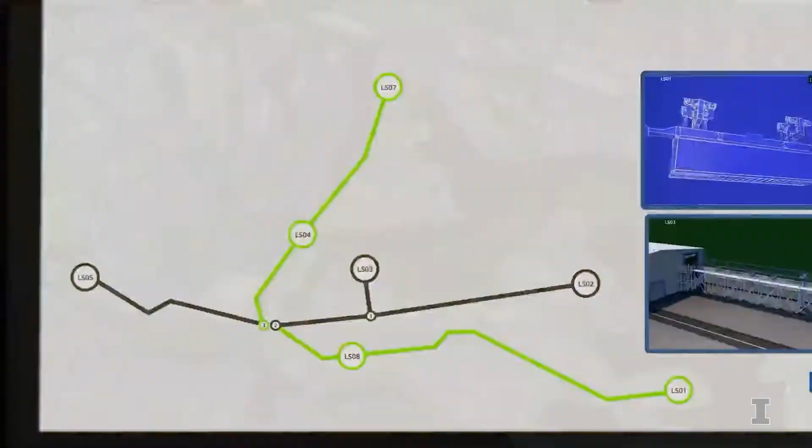The global container shipping industry. Largest network on Earth. Billions invested annually. The mission: more efficient, automated, and data-centric ports. The obstacle: short-haul drayage, dirty, manual, and chaotic. A process still managed with clipboards and mobile phones, coupled with inefficient, diesel-polluting trucks. In short, a failure to keep up with increases in ship sizes and efficiencies in automation and intermodal AI. The solution: EagleRail Container Logistics. Automating short-haul container shuttling processes, improving drayage moves per hour, enabling faster ship turns and greater terminal slot productivity. EagleRail, the world's first and only patented electric overhead container conveyance and routing solution.

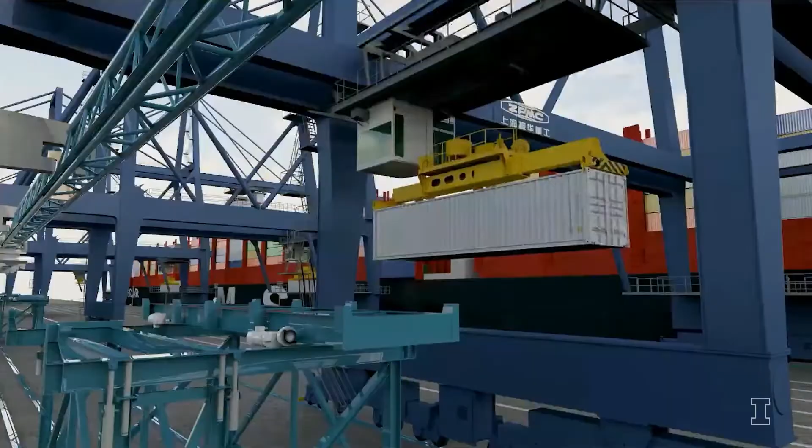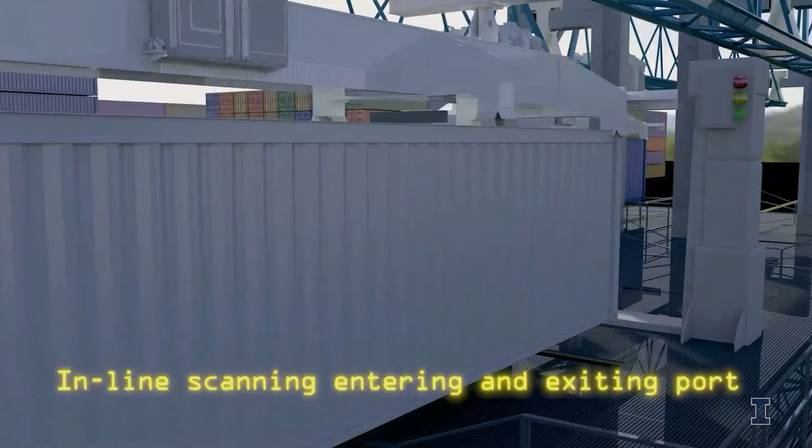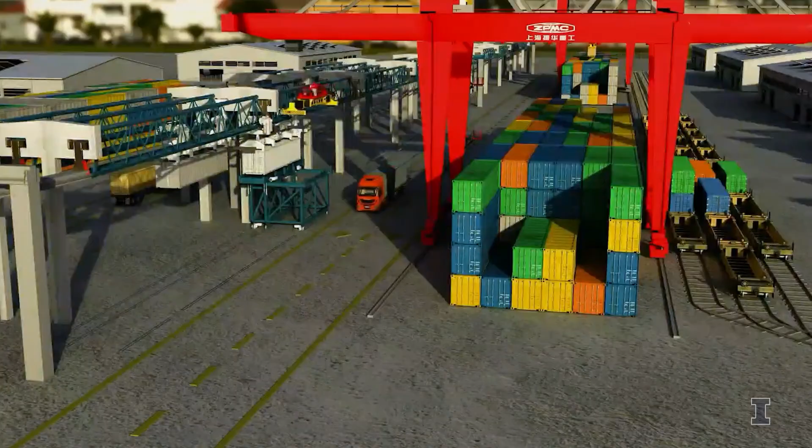EagleRail interfaces with ship-to-shore cranes. Berth evacuation is quick and automatic. Containers are lifted to automated carriers and routed via sophisticated switching. The operation is controlled by Eagle Eye, our intelligent vision software. EagleRail also picks up and delivers from backstack areas, receiving and sending import, export, and transshipping containers to and from inland logistics, operations, and rail yards. EagleRail utilizes unused airspace, and each network is modular and customized per terminal, based on flow rates and functional needs, including customs clearance and scanning operations. EagleRail replaces aging diesel drayage trucks, eliminates gating system bottlenecks, vastly improves overall process efficiency of shuttling containers while reducing air and noise pollution. Result: improved safety and quality of life in surrounding neighborhoods.

EagleRail can be designed in expandable phases connecting ports with rail networks, intermodal parks, special economic zones, and industrial corridors. Result: a clean, safe, and digitally managed and tracked overhead network. EagleRail also supports loading of today's cleaner, long-haul trucking outside of cities at hinterland intermodal facilities. Drives through city centers can now be greatly reduced. Fully electric, EagleRail reduces carbon emissions by over 60% compared to diesel vehicles. Option: the rail's topside can be equipped with solar panels to augment system power needs. EagleRail goes where trucks and trains cannot. Therefore, it stands as complementary, not competitive, with port automation plus long-haul intermodal trucking and railroad investments. Faster shuttling, smarter routing, cleaner technology, digitally connected.

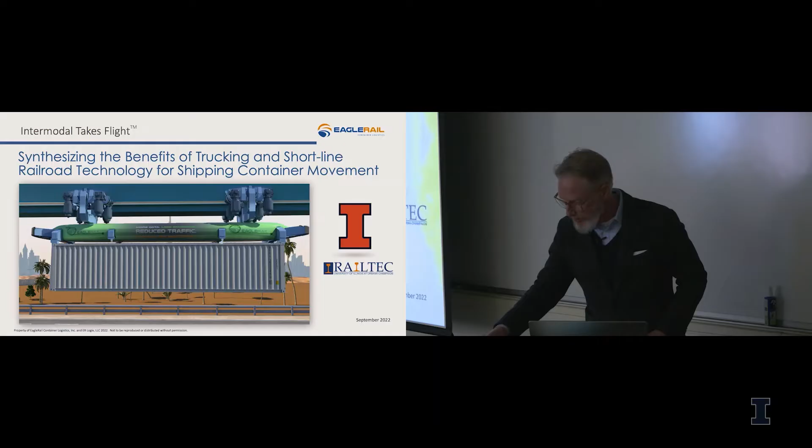EagleRail, intermodal takes flight. So what's a marketing guy doing in rail engineering?

Well, I guess I became sort of a de facto rail engineer 7 years ago. I have engineers working on our team, rail engineers, electromechanical engineers, process engineers, and I've gotten pretty good at understanding the technology of it. I've been in a lot of meetings with very smart engineers from a lot of countries, a lot of ports, throwing a lot of challenges at us, and I really feel like the solution holds up. Let's see if this will work here. Obviously, this is the problem.

If you've never been to a port town, that is how containers get in and out of the gate. So we are talking about just the gating process. We're not talking about the long haul or shuttling within the terminal. We're talking about getting them from the terminal to a nearby railhead, an intermodal yard, or some nearby satellite facility.

This coincidentally happened to be the cover of last Sunday's Tribune in Chicago, and yes, I'm an old guy, so I get the print version to get the crossword puzzle. Pollution, health risks raised on freight corridors. If you don't know Chicago, we have a big intermodal facility where the East Coast and West Coast Class 1 lines exchange containers, and people are becoming very afraid of the pollution and safety that short-haul drayage trucks create.

We do have the patents for both the system and the carriers. A lawyer told me a long time ago to get these, but they're not going to protect you unless you can spend millions of dollars defending yourself in court. But investors like it, so I got them.

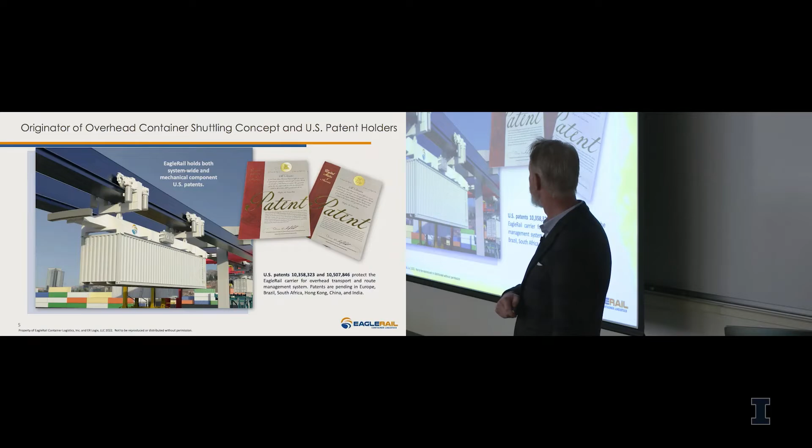I'll talk a little bit about technology in detail coming up, but this is our system. It's primarily a carrier that shuttles, has 20-foot locking pins and 40-foot locking pins, because containers have two connection points. The larger containers, 45s, 53s, still use a 40-foot pin area.

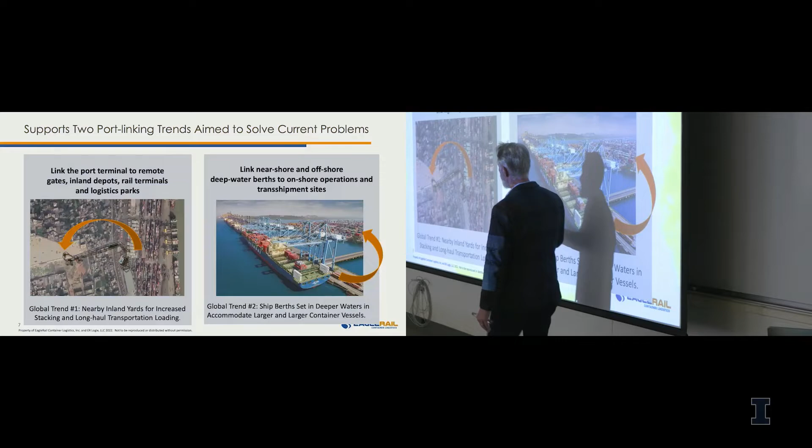The two main uses are going to a nearby intermodal yard. This is a really nearby intermodal yard, happens to be across the street. If you look at the picture on the left, this is Chittagong, Bangladesh. This is their river port, this is their yard, and their new overflow yard is over here. Currently, to get a container from here to here, they have to take it out this road, go through town, come back around the backside. It's about a 2 to 4-hour journey. So they wanted to go right across the street, and we've developed this little shuttling system for them.

And the other trend, of course, on the right is deep sea ports. As ships get larger, they can't come into seaports, so instead of dredging, they just build the docks out further with jetties, and then you have to sort of get your containers into the terminal. So we also have some jetty systems as well.

One of the biggest benefits is connecting it digitally through IoT to smart cities and the whole network. What's interesting is ships have digital manifest stowage plans, ports have TOSs or terminal operating software, rail has their loading plan, but when you go on a drayage truck, a lot of times you're on a cell phone and a clipboard, and so that data link drops.

So one of our big advantages is completing the data link. If you can evacuate a port faster, you can make a lot more money for a port. It's like an inventory turn in retail. Each one of these slots has a certain target goal for money. Every time that container sits there another day, either somebody has to pay for it, a demurrage charge, or that slot is losing money. If you can evacuate containers faster, you can have a higher throughput on the same piece of property. The biggest problem in ports today is they're growing about 4% a year, year over year, on the same piece of locked property.

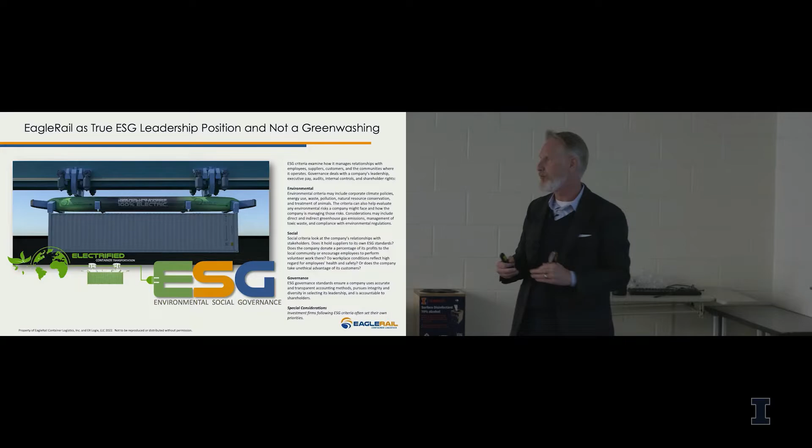We also have a huge ESG component, so environmental, social, governance. Obviously we're all electric, we consume 60% less energy, 70% less particulates. Social, we're safety, we improve safety around port towns. And governance is what you want to make of it.

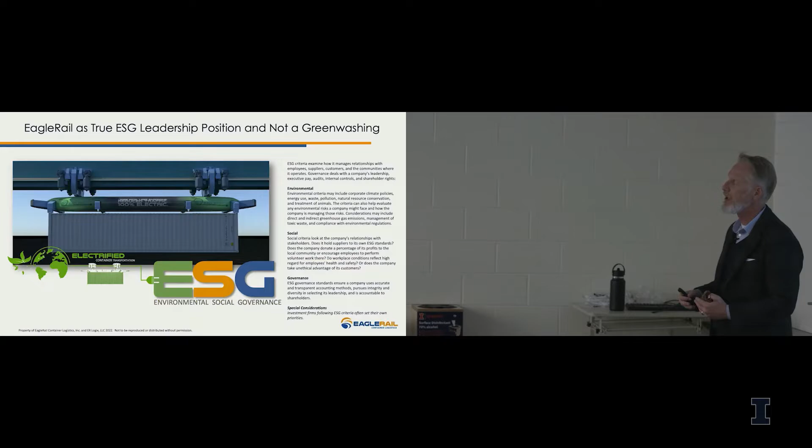Clean business, governance. We go to a lot of these countries, and I get these sort of winks and nods about what it will take to get a system built here, and we don't play that game. We'll never play that game. We're American companies, we're held to the highest standards. I will never do anything that's non-reportable to get a project built.

EagleRail created this company called ER-Logix. ER-Logix is a devco. If you understand the business, there's really complicated rules about who can invest, who can have a legal license in various countries. So we created a legal entity called ER-Logix, or ERX.

We've been to all these countries. I've probably been to half of those myself. And now with Zoom, the pandemic did something nice for us, it cut down my international travel. Sometimes it's a 24-hour flight in coach, I can't afford business right now. If you've ever had a long flight in coach, it's miserable.

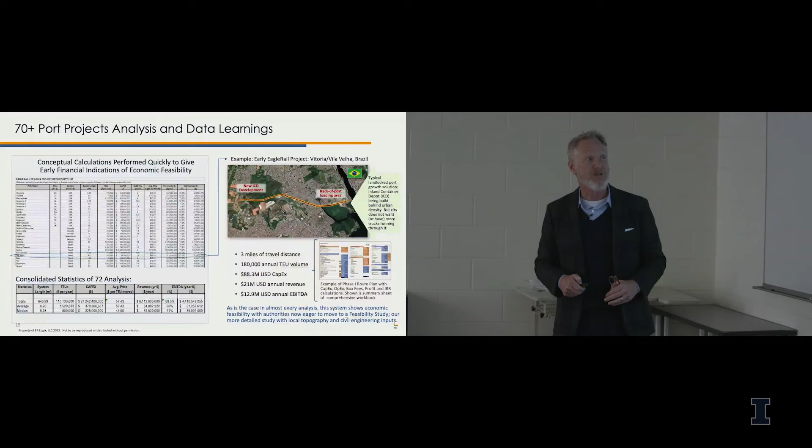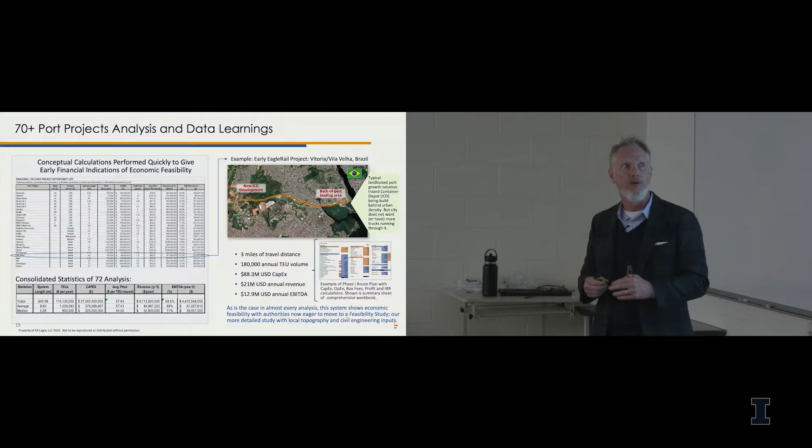Now we do a lot of our calls just on Zoom, and the outcome of these meetings is what we call preliminary design. If I know three things, I can do some calculations. If I know where the pickup points are — 1, 2, 3 on this map, here's the port, here's intermodal space 1, here's intermodal space 2, a new one — then I know the distance of track, and then I need to know the volume between each node. With those three factors, I can create a pretty rough CapEx and OpEx.

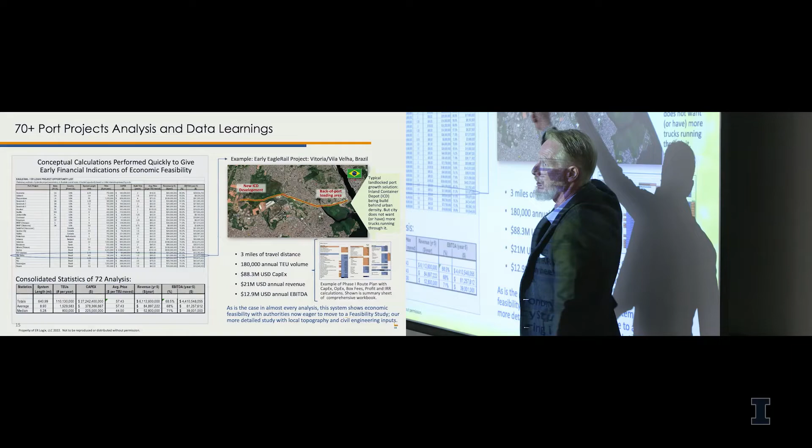If they want to buy it outright and have us do maintenance, or they want us to operate it as a service, shuttling as a service, then I could tell them what per box move costs. So the first thing they always want to know is, how does that compare to my truck? If you're going to charge me $80 to go that way, what's a truck going to cost to go that way, right? And I always say that's not the question you should be asking, because there's all sorts of other things we can compare in our price.

All those social and environmental benefits can be quantified: number of pollutants avoided, road construction avoided, road maintenance avoided, safety improvement. Those are all quantifiable, and we can actually show why maybe the truck is $70 and we're $80, but it's still a better long-term economic decision.

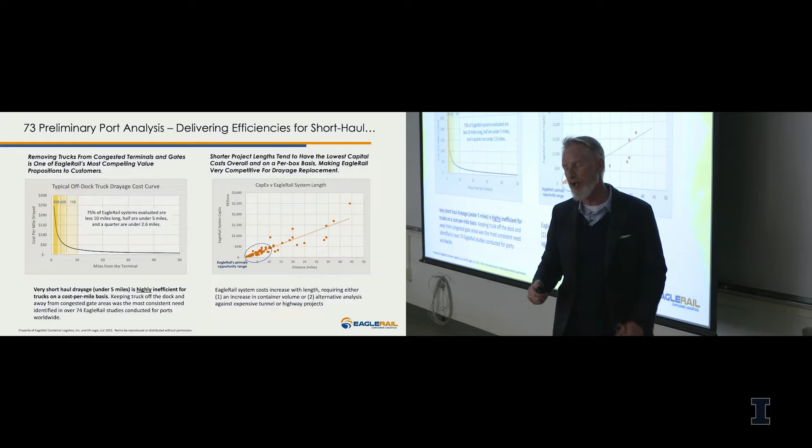What we have done collectively, as we looked at those 72 studies, is we've realized what we knew intuitively: we're a really good system under 10 miles. Once you go past 10 miles, you should put it back on the ground, because that steel is expensive. You don't want to have it.

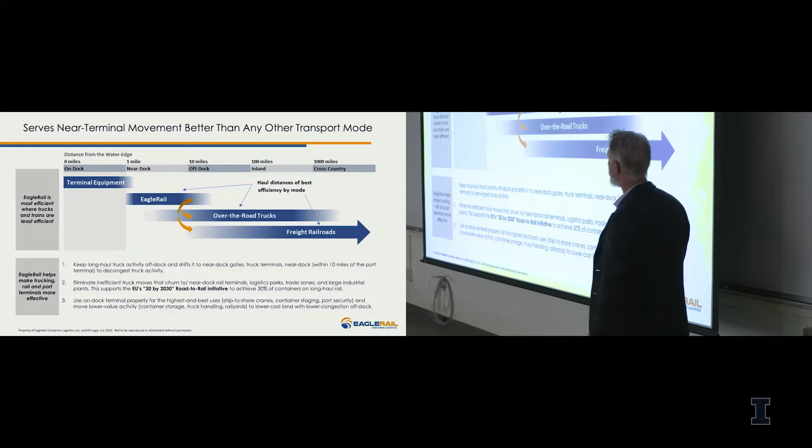Most of you have been to Chicago, you know what the L looks like — our structure is very similar to the L. It's elevated steel, and that stuff's expensive, so the faster you can put it back on the ground, the better off you are. We did a little analysis of what types of horizontal movement containers should be handled by: if it's on the dock, terminal equipment; near dock, overhead shuttling is perfect; a little bit longer, an off-the-road or over-the-road truck; and if you go long, of course, nothing beats long haul rail.

Another analysis we did: if a port wants to expand, how many millions of dollars is it per slot? We did an analysis based on a Long Beach expansion project. Long Beach is expanding, $2.2 billion to get a certain amount of slot capacity, which comes out to about $1,200 a slot. If they were to build a satellite storage operation and an EagleRail system, the EagleRail system is about $300 per new slot. You'd have to add in the cost of the satellite too, but it's going to be less than the $1,200.

Now, I'll get into a little bit of the technology details.

We break our system down into 5 components: the electromechanical, the carriers, and then the lifters and loaders, because the load table has to be raised up, trusses and columns, the civil, and then a more civil track, rail, and switch, which is in your bailiwick, and then of course the operating system and our scheduling software called EagleEye.

It's really a TOS, basically. It works with the port interface to say these boxes are going to be ready, they're going to this node, and then it starts to schedule where it goes. Where it really matters is if you have a single line system or just 2 points, it's not that big of a deal, you're just going back and forth. If you have multi-nodes, then you want 3 going this way, 3 going that way, 3 going this way, and then coming back, what are you taking back?

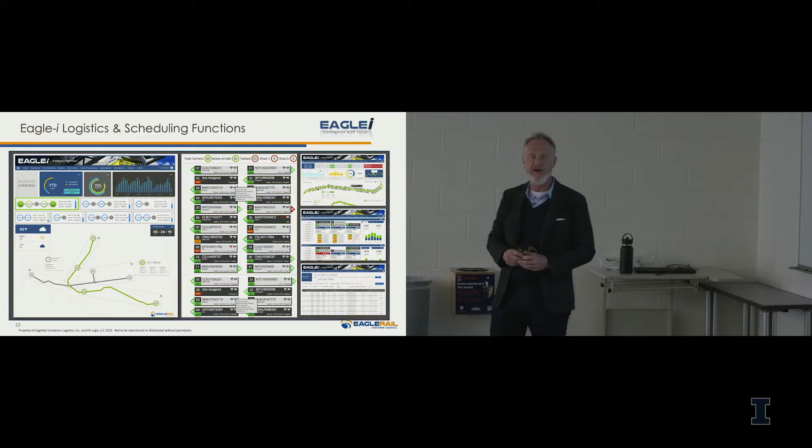These are basic artist renderings of our beta software design. This happens to be Durban, South Africa. It's a very complicated multi-nodal system. It has two berth-side pickup stacks, it has a rail yard here, another rail yard here, a truck yard, and a truck yard.

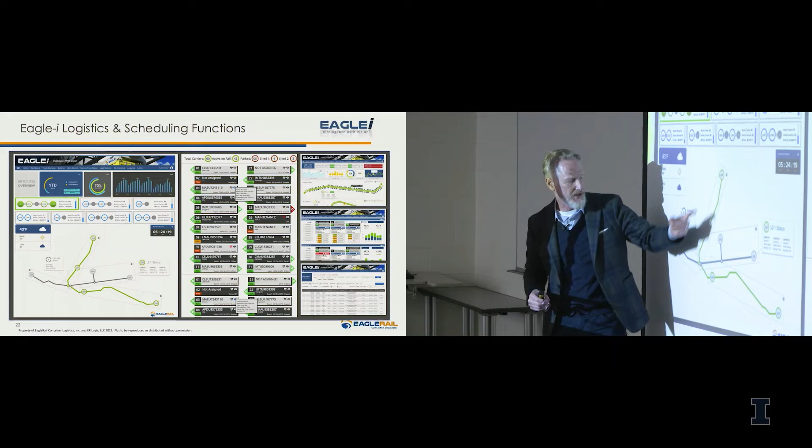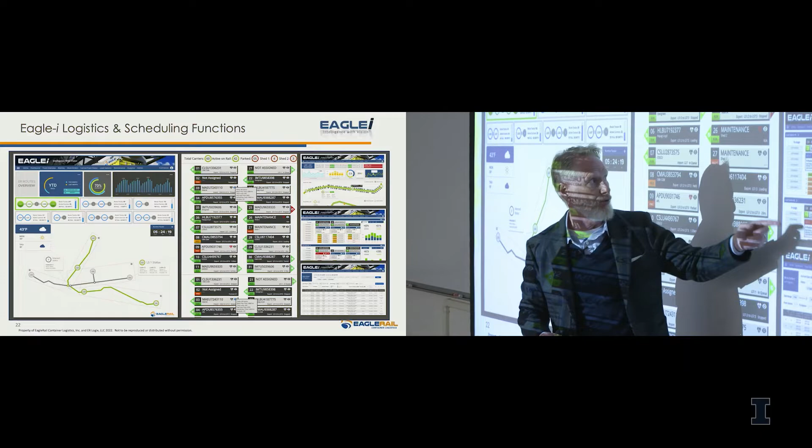This is our vision for what the operator will see when he's running it. It's like a remote train system, as I'm sure you're familiar with. Our carriers are married to every container, each has an ID, our carriers have an ID, and they get married for their time on the journey. We can track all the time where the carriers are, look at the activities of the load stations, and look at the general scheduling for the day type of operation.

The electromechanical up close, we have 2 types of trusses. One is a box girder, and one is a lattice structure, just like you see here. These are obviously more visually pleasing for installations around urban areas. That box girder is a little bit of a hulking thing. And I'll get into the structure.

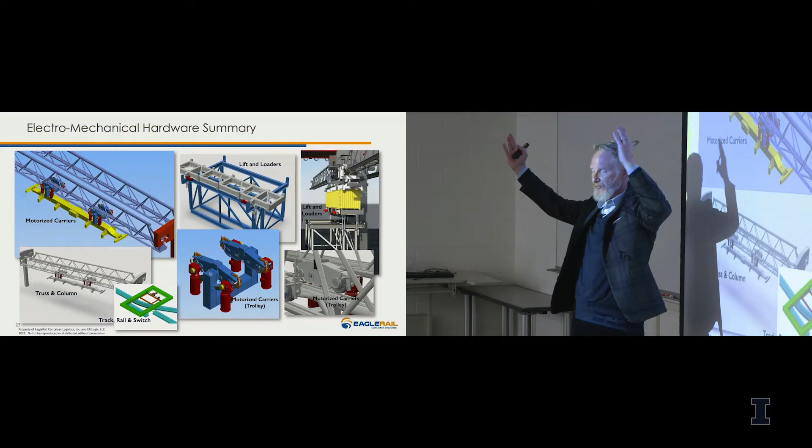This is the overhead switch, very much like a ground rail switch, but it's in a framework up above. It has to slide forward and backwards, or side to side, I should say. The carriers, the wheels, it's steel on steel.

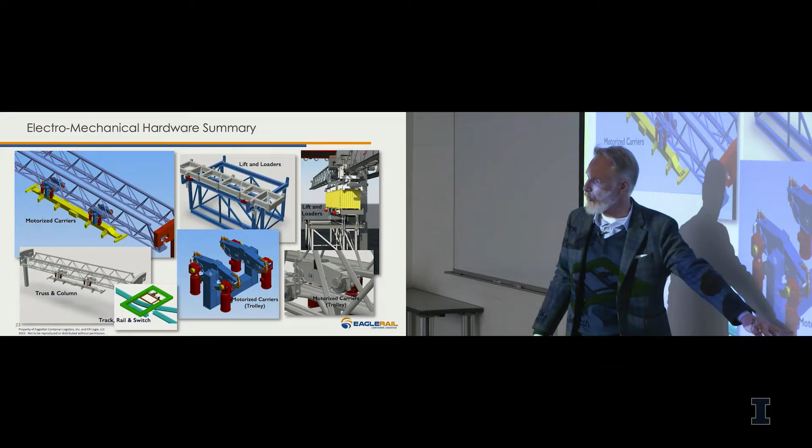We have traditional motors from port equipment, a drivetrain, side guide roller wheels, which I'll show you in a moment. The table can move in 2 dimensions or 3 dimensions. You put it on the table, it can slide back and forward, and then up and down. It can also gantry on wheels to follow another gantry crane, whether it's a ship-to-shore crane, an RTG, or an RMG.

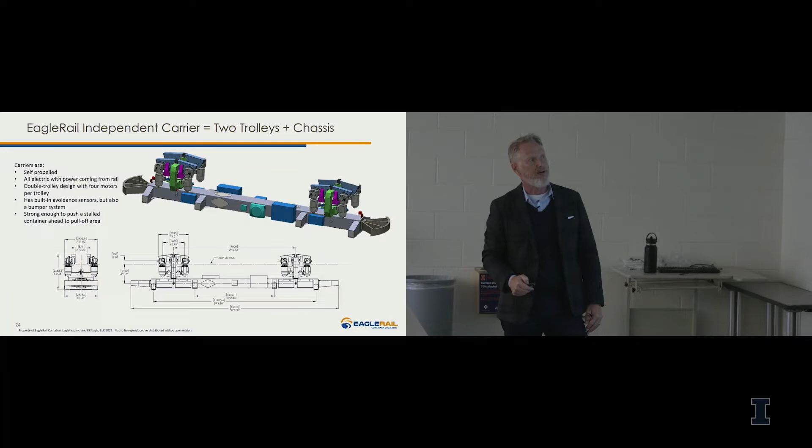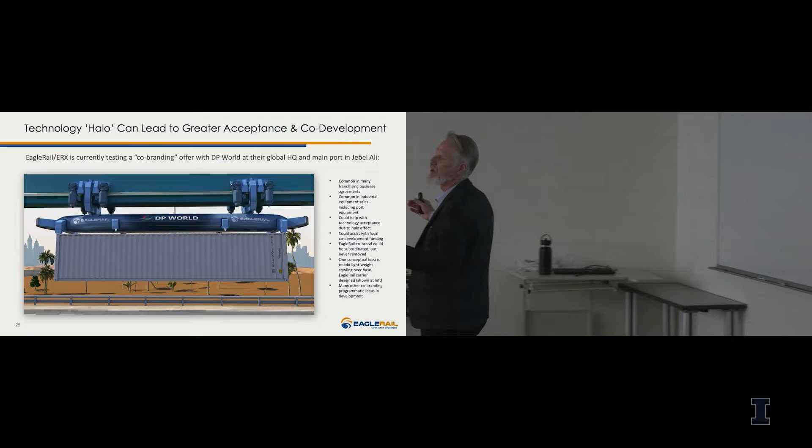That's the carrier, what it looks like, the skeletal part of it. We have this program where we can add a lightweight aluminum cowling to it and co-brand it. So when you're going to a port and pitching them, they don't necessarily want to see EagleRail running around, they want to see their brand running around.

So this is what the current trolley design looks like. There's 4 motors each trolley, and 2 of these on each carrier. It's designed to be strong enough so that if a fully loaded carrier carrying a box stalls or loses power, the one behind it can actually push it forward. So the motors are strong enough to do that.

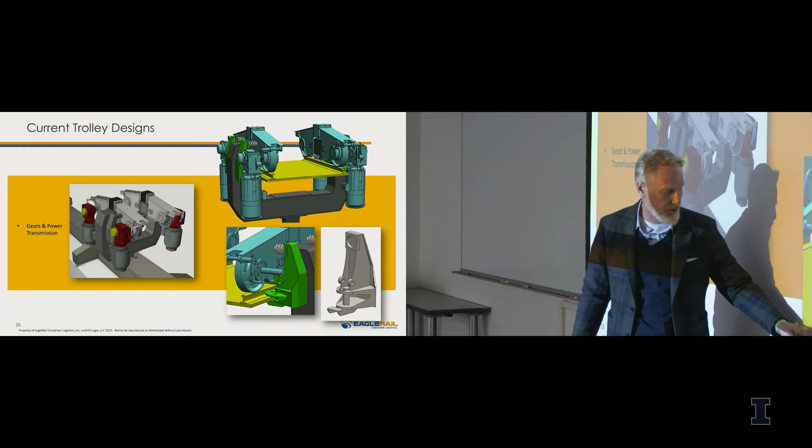It has side roller wheels on it, as you can see here and here, and it also has an I-beam or crane rail design as well. Our components, we've been redesigning and tweaking this thing for 7 years.

Obviously, one of the most important parts of this is the kingpin, locking it to the trolley. If you know how containers work from that video, they have those corner casting pins that come down and lock. Those almost never fail, one of the lowest failure rates. And a container can really be hung from 2 of the 4 — even if 2 failed, the other 2 will hold up the container.

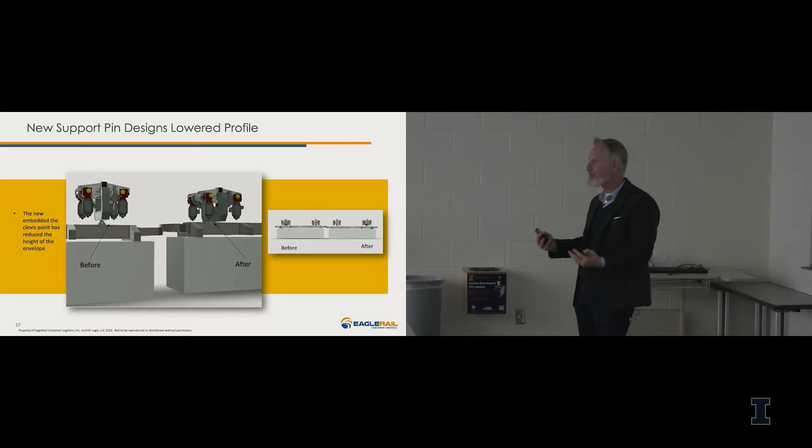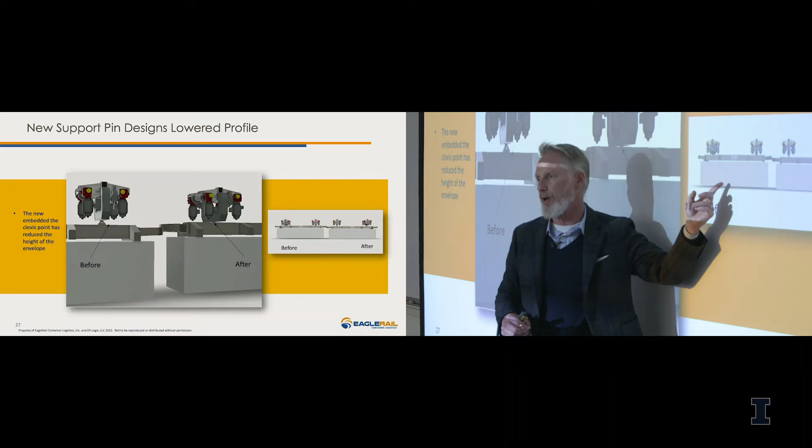The only time, once in a great while, you'll read about a bottom opening up on a container — if you get something like a marble load or some stone order, it might puncture through the bottom. That's why we have the catchment when we pass over passenger areas.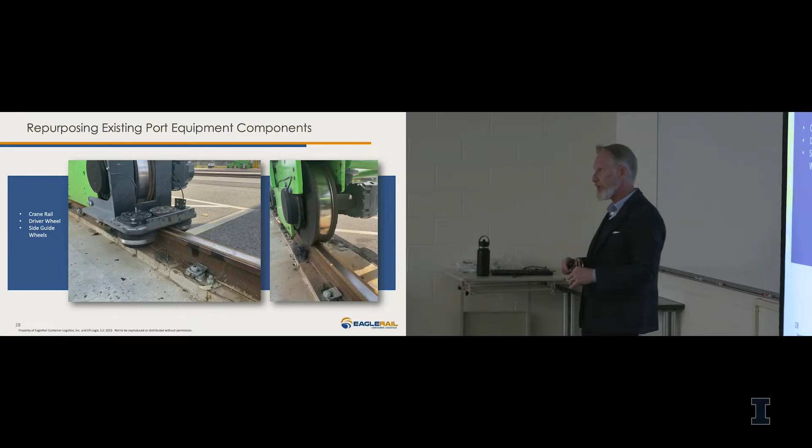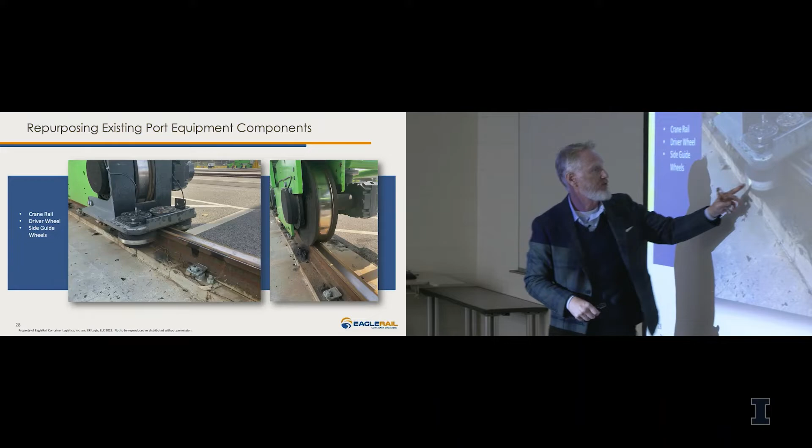This is in Savannah, they just opened up what they're calling their mega rail center, and this is a gantry crane that loads the rail cars. But why I'm showing this to you is the rail — the guide rollers are similar. Our wheel probably won't have a flange on it because there'll be no need, but we use very similar guide roller wheels as well.

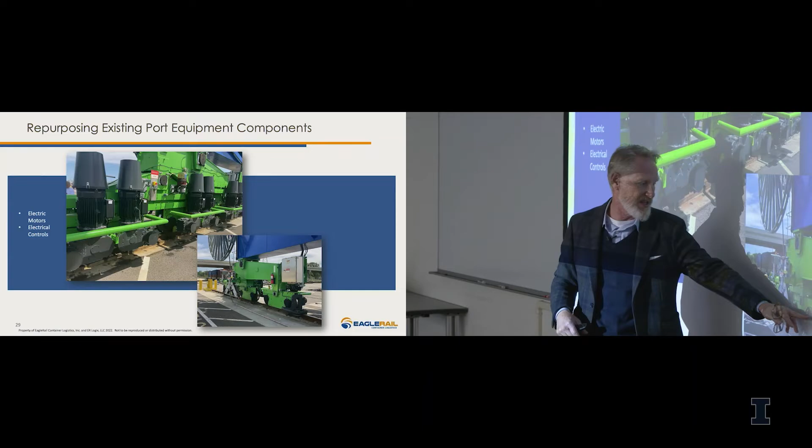This is — I don't know if you guys have ever seen one of these gantry cranes. They're unbelievably large, right? What's fascinating is not only are they gantrying in two directions, but they're doing it with a fully loaded box on them, which is really quite heavy — 70,000 pounds. Those gantry cranes will have 4 of these and 6 wheels.

But the components we're using are exactly the same — those motors you see hanging on ours are the same motors, just above the wheel on theirs, and below or next to the wheel on ours. So what's really interesting is when I talk to ports, rail companies, and investors, they ask what the technology risk is, and I say it's almost zero, because I'm just using a kit of parts from other pieces — all the crane and rail industry technology, I'm just repurposing into an overhead system. So it's all proven technology.

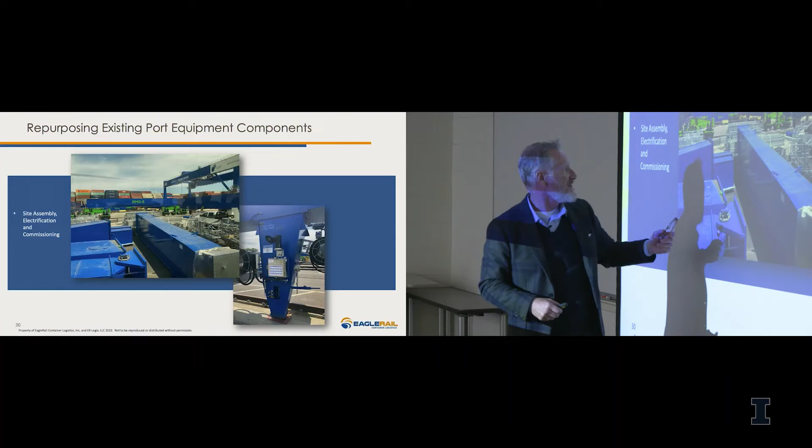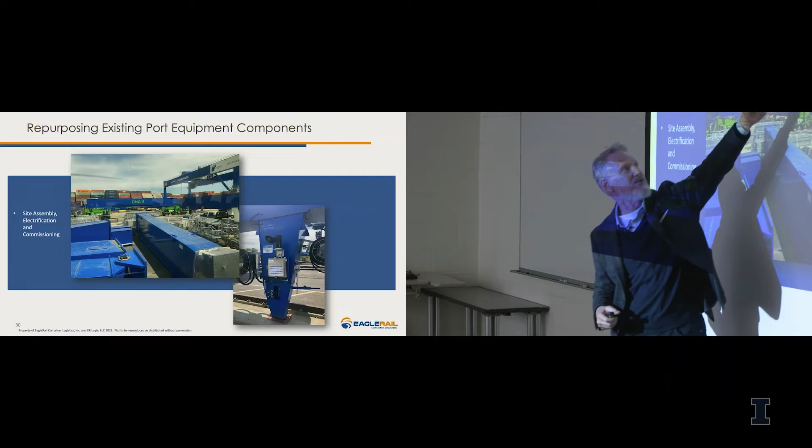This is one of those gantries back here. And this — I just couldn't help myself — it was like IKEA. They were unwrapping a new one and all the bolts were in a bag, and I'm sure there were instructions with pictures. So they're standing one of these things up. I think it's their 8th one, something like that.

RMG is rail mounted gantry and RTG is rubber tire gantry. You'll hear those terms a lot in ports.

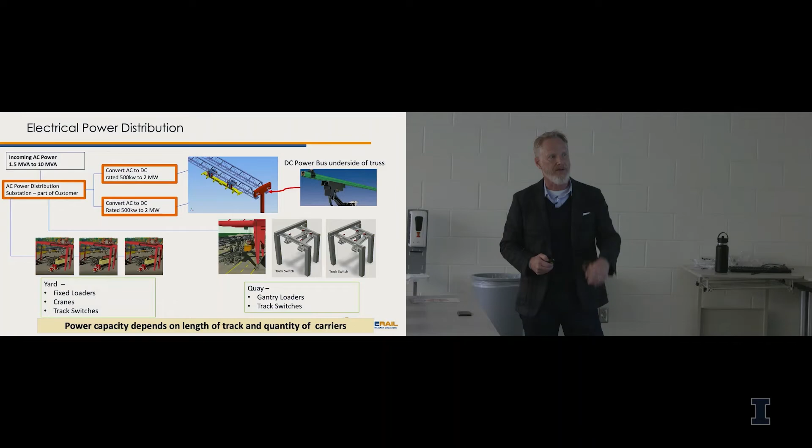Power distribution: we take the AC and convert it down to DC. It's on a bus bar, pretty simple, and it has to run the length of the track. There's an overhead switch as well.

My favorite truss design, of course, is the tubular truss. If not tubular, then a flat truss design. I think it's just a much more elegant system.

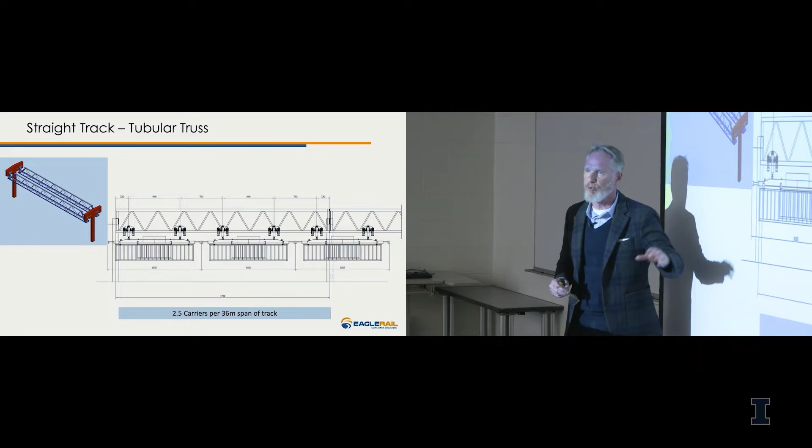We designed this — we were talking about it in our private meetings. What's the strength, how strong should we make this rail, how much steel should we put in there? A fully loaded container is 70,000 pounds — what happens in a power situation where you lose power temporarily and have fully loaded containers hanging off the steel? How much weight can you suspend and for how long is a big safety question.

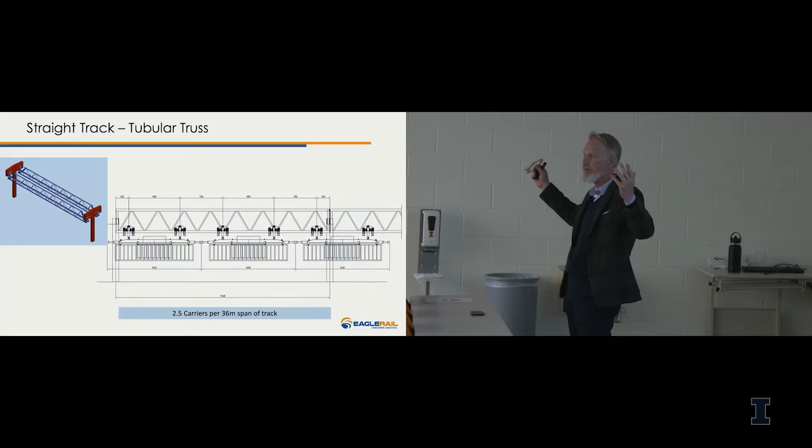Interestingly, only 2% of all containers are fully weighted out. They call it maxed out on weight or maxed out on cube. They're mostly cubed out - the space is taken up way before it's ever hit 70,000 pounds. But we feel like we have to design for the heaviest containers possible. That will affect your truss length, the number of columns you'll put up, and how deep you'll put your piers.

Every once in a while, someone will say, why is that not on top of the rail? Why is that suspended? That's a question I get in almost every presentation. The reason is most of our interfaces are from the ground up - we're taken from a stack. It's very much akin to factory automation, where you see parts moving around on a suspended rail and being set back down. That's a very similar model to what we do.

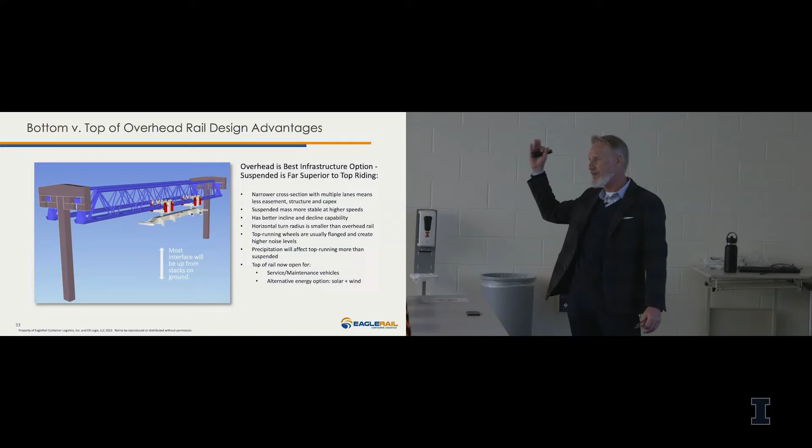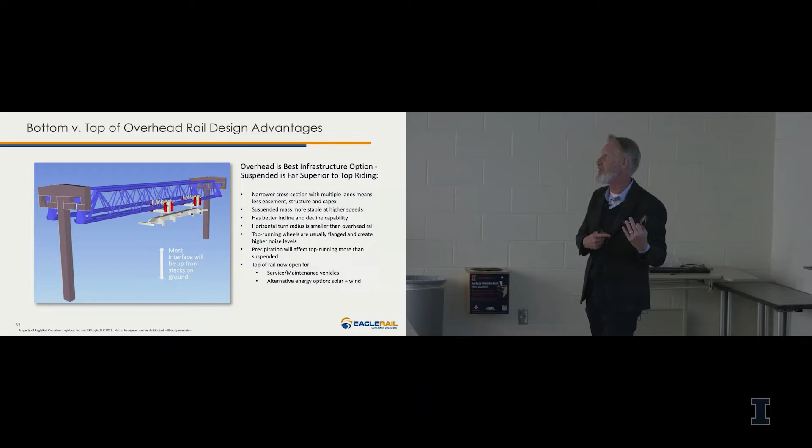Number 2, suspended weight can go around a corner much faster without having the centrifugal force wanting to fly off the top. It has better incline and decline capabilities. Therefore the profile could be narrower, the turns can be narrower, there's less steel. That's my patent - I have a patent for underneath. So if somebody wants to come into the market with an above the rail system, we'll be competing.

Our track and truss can be single lane, double lane, or triple lane. The one we quote the most is a two lane going back and forth. If it's lower volume, we can do a single lane. A lot of these really large volumes need a third lane - this is your loader lane where you're picking in and the table's going up and down. This is your middle lane, taking empty carriers and putting them in the queue for the next container. And this is your bypass lane. So when we go into heavy volume situations like a rail spur, we create a three-way spur.

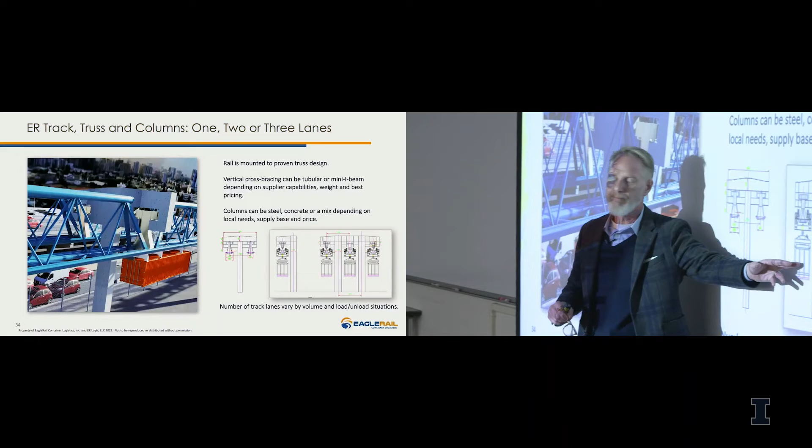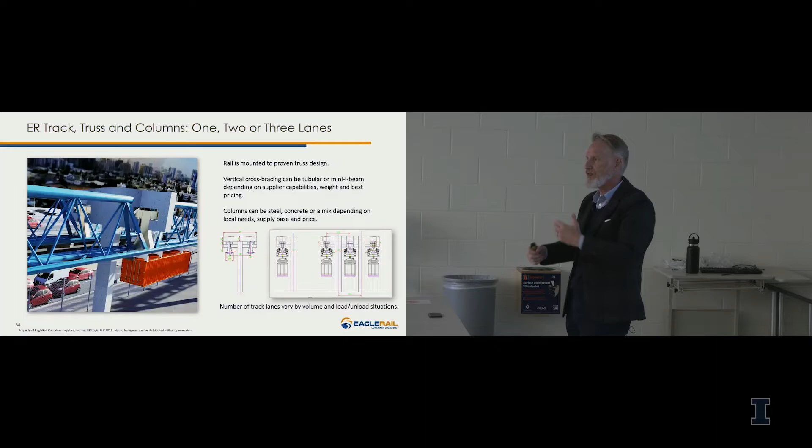Now what's really interesting - a single lane can shuttle up to about 400,000 or 500,000 a year volume-wise, and we do a volume rating. The only way we could do that, if you think about it, is you have a two-node system and you send your containers headed toward each other - you have to have a center bypass for them to go past each other. So it's not completely single lane, otherwise you'd be waiting for a complete clearance, and you don't want to do that. To keep up your shuttling rates, you have a bypass situation.

You design to bypass, but now you have to platoon containers - you've got to take 4 and 4 and send them toward each other, bypass each other. So there's a lot more operating involved. If you do a double lane, it's not quite 2x the expense - it's about 80% more. But once you do a double lane, your capacity goes to about 4 million a year because you can almost never clog that system up, and then you go to triple lane.

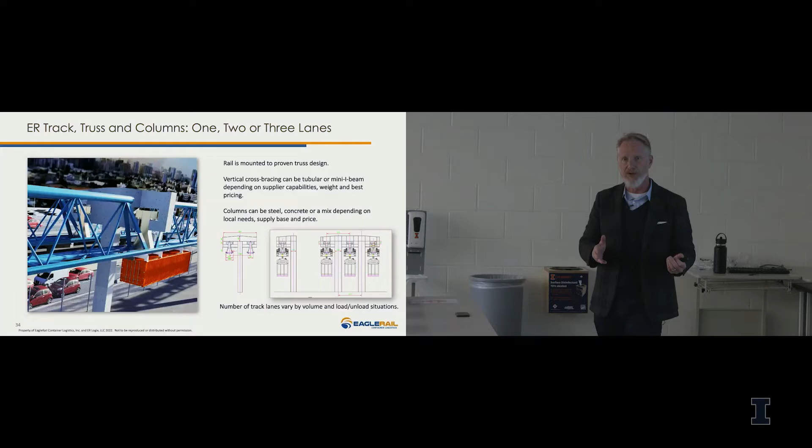Just for reference, a typical container ship, the bigger ones now, are about 20,000 containers, which is huge - they started out being 4,000 and 5,000, now they're 20,000. Our two biggest ports in the United States process about 7 or 8 million containers per year annually. The biggest ports in the world do 40 million - Singapore or Shanghai, it's unbelievable. Singapore, Hong Kong, they do about 30 million.

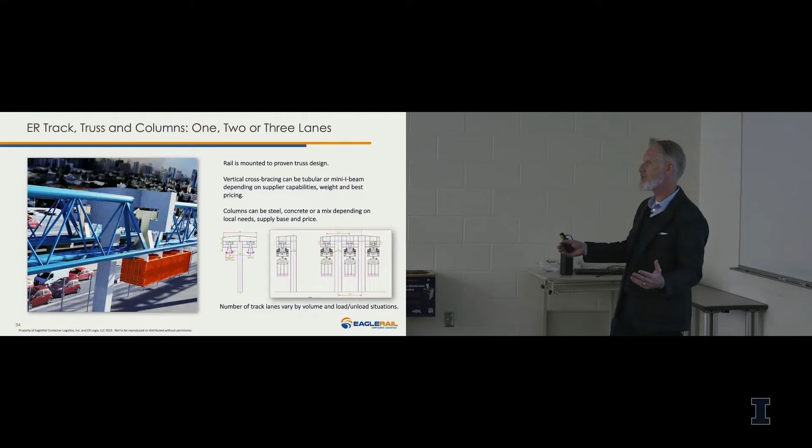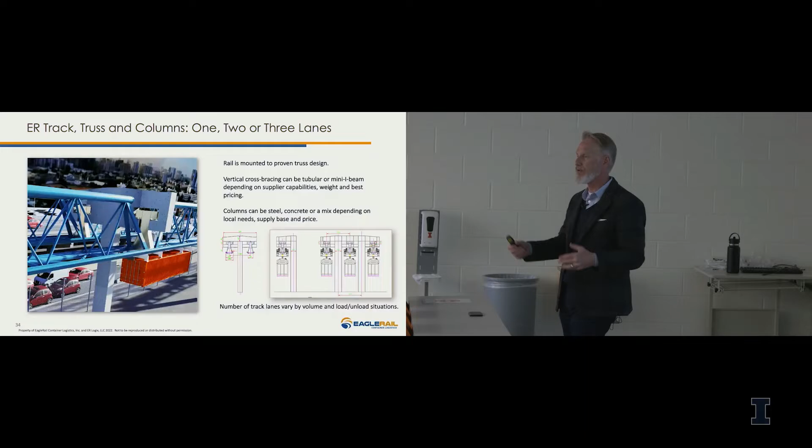So we have been approached to do systems ranging from 200,000 shuttling per year to 5 million shuttling per year. It depends on my 3 components: volume, pickup nodes, and length of track, and I could do a pretty good estimate on that. Of course, we have a catchment - we were talking about it. Something for students like you to think about, this catchment.

Since the corner castings only fail about 1 in every 2 billion uses, and the bottoms open up maybe twice every 10 years, it's a very rare occurrence. But from a safety perspective, nobody in the world will let us put a system in without a catchment crossing.

But what should it be? We talk about this all the time. Should it be some super strength fabric? Should it be a metal? A chain link? Should it be mesh? And how close should it be to the actual bottom of the container so you're not building momentum before the failure?

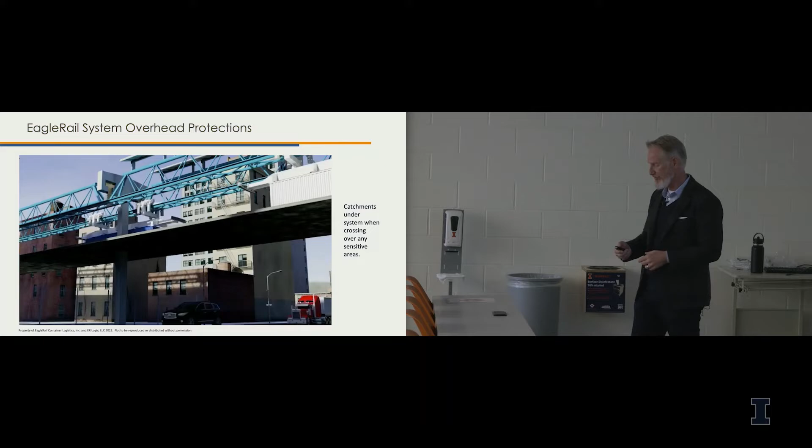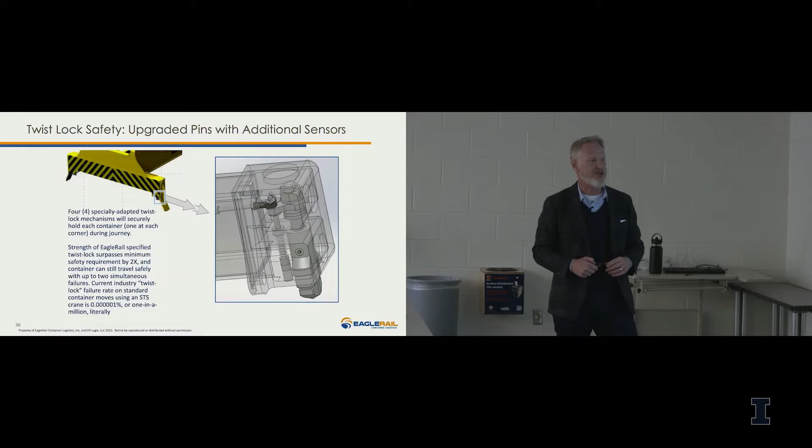So we have several systems we've designed, and I'd be curious what you think a good catchment would be. We have the standard corner cast locking pins, but we've beefed them up so we reduce the failure rate of the corner castings. Again, a container can hang off of 2 of them even if the others failed—this is our overhead switch, with a couple different designs.

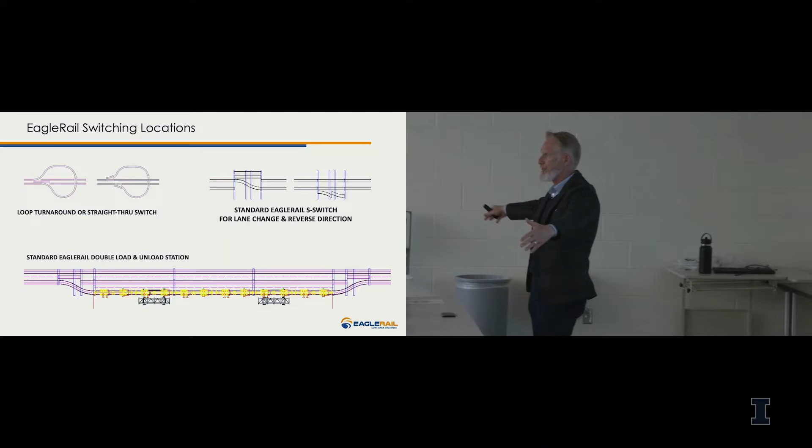One of the things people come to us and say is, right now where the boat parks is called a berth, and they say, I have a berth here, but in 5 years I'm going to have a berth here, and another berth in 5 years after that. So we have a system where we can create a loop turnaround once it gets to the end of the first one, but we pre-design it so that when they expand, you have a pass-through system.

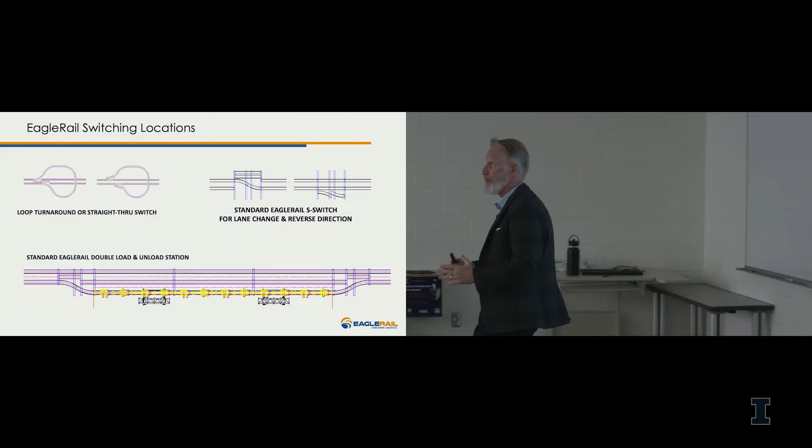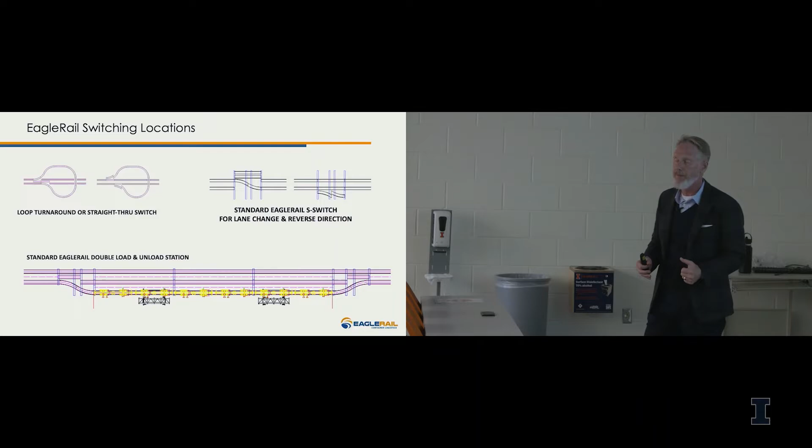We really want to know, when designing a system, what's your 30-year volume? We don't want to know your current volume, because one, we want to support the capacity, and two, the only way people operate ports and buy those expensive cranes—those cranes are $10 million each—is to get a 30-year operating concession. That's how you lease equipment: I'll move your boxes if you give me a 30-year agreement to do it. We have to have a similar long-term agreement in order to afford this equipment. So I need to know when that berth goes online, and have the complete volume projections.

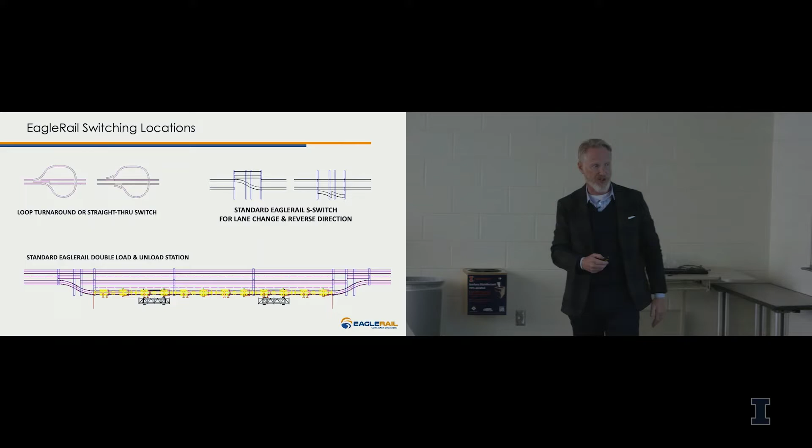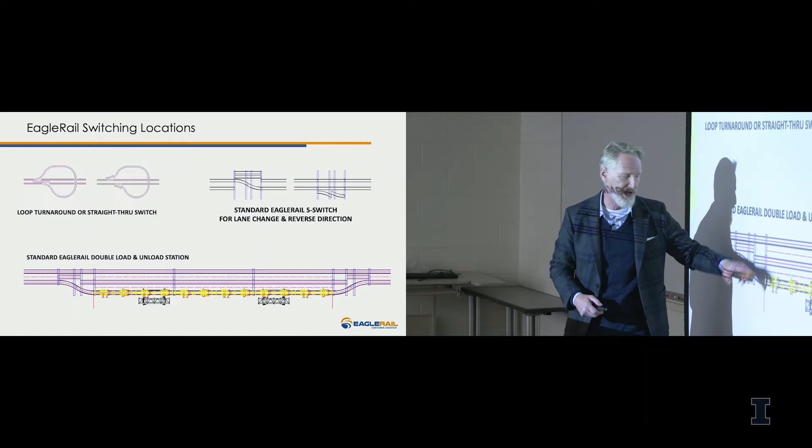This is what I was talking about for the 3 lanes, for a heavy volume pickup situation where you have your pickup lane, your empty carrier bypass or queuing lane, and your bypass lane. That's the load table we talked about, and that's the gantry version of it. This is a fixed truck version.

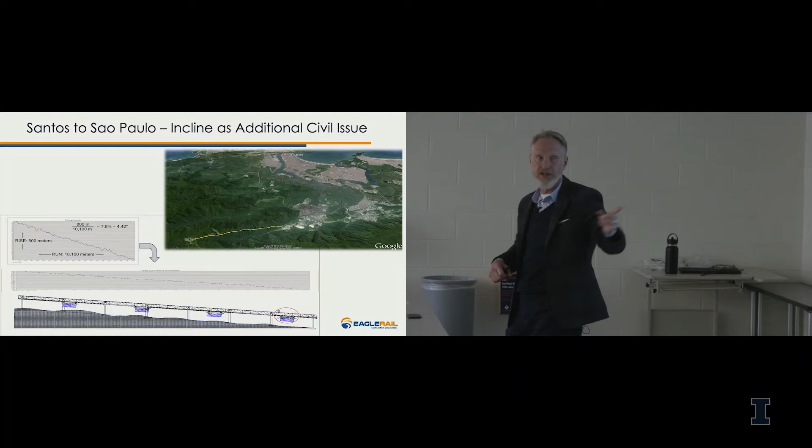In Santos, Brazil, we have a special challenge. This is Santos—Sao Paulo is up here—and it's one of the biggest escarpments. A lot of ports are built on shorelines lower than the city, so how do you get containers up? Right now they have 2 roads and don't want to build a 3rd highway, but they want this port to keep growing 5% a year. It serves mostly the Sao Paulo consumption market, but it's also the launch point into central Brazil for all this cargo. So we have designed a system.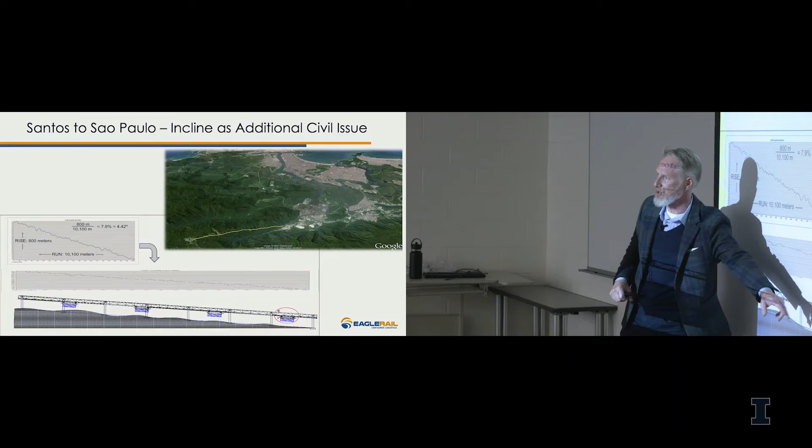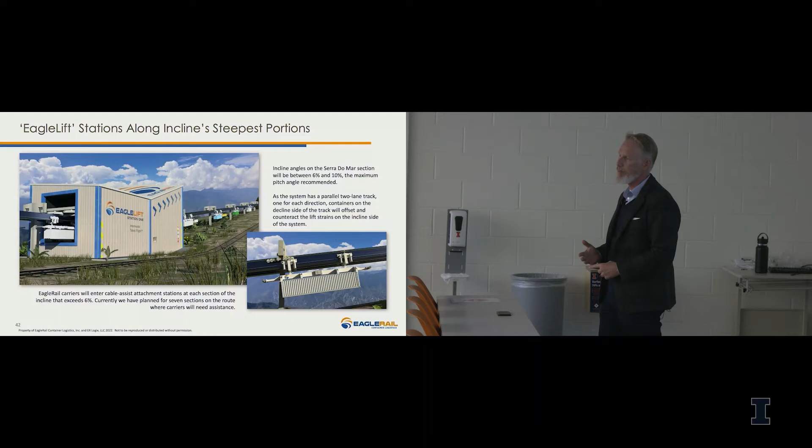One of the other advantages I didn't mention for suspended overhead is we don't have to worry about the undulation of the ground—we can level those things out, or close to level. We're working with 2 ski lift companies, Doppelmayr and Poma Leitner, out of Europe, to figure out how to do a rope assist. Our system can go 6% grade on steel-on-steel wheels, which is quite a bit steeper than ground rail, but once you get over 6%, we can't pull that weight.

So we have designed conceptually these ski rope lifts where there's a hook which will grab the container for certain portions of the run when it goes above 6% grade.

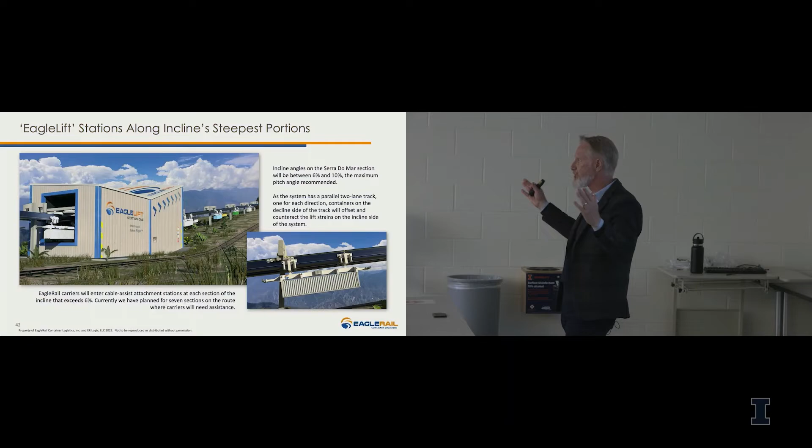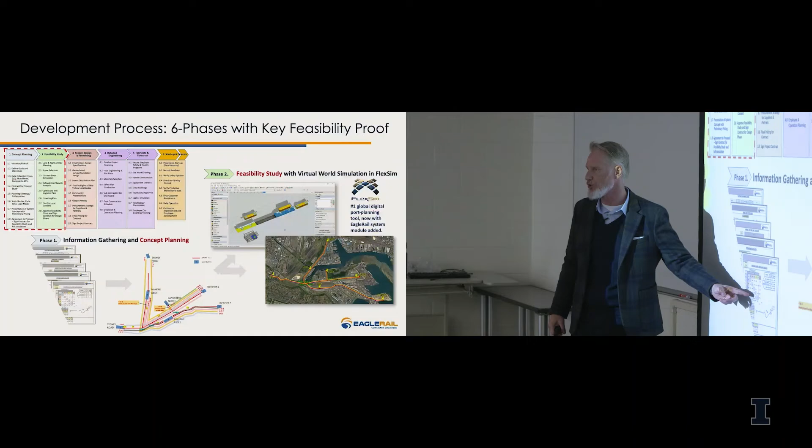How we get started: I mentioned earlier we have 6 phases. We have an information gathering and concept phase. This is what Durban looked like when it was in that phase, with these different nodes, and what we call our node-to-node distribution. This is where we can do a pretty quick, down-and-dirty representation of cost. Typically we get a green light and they say, okay, that's within our budget, or that's feasible over 30 years.

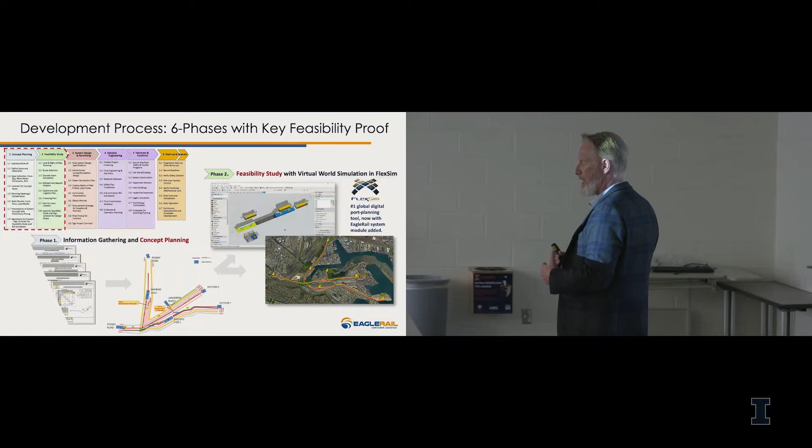Now what do we do? What we want to do now is simulate it. There are a lot of simulation programs out there for rail—we use one called FlexSim or FlexTerm, one of the largest in factory automation. Tesla uses it, FedEx uses it. Anytime you have what's called conveyance, with things running in a loop, you want to simulate it before you build your factory. So it's an algorithmic system.

Just knowing that we're going to move X millions of containers or 100,000 per year isn't the best design criteria. It's your peak. What's the most you'll ever use at one time? So we have to design backwards from peak throughput.

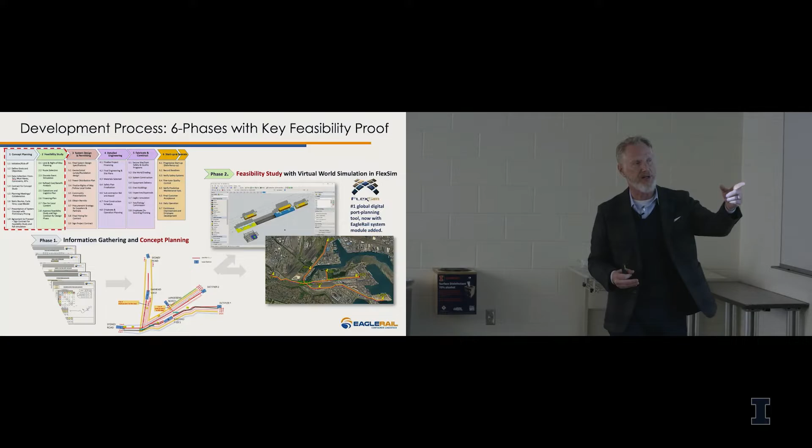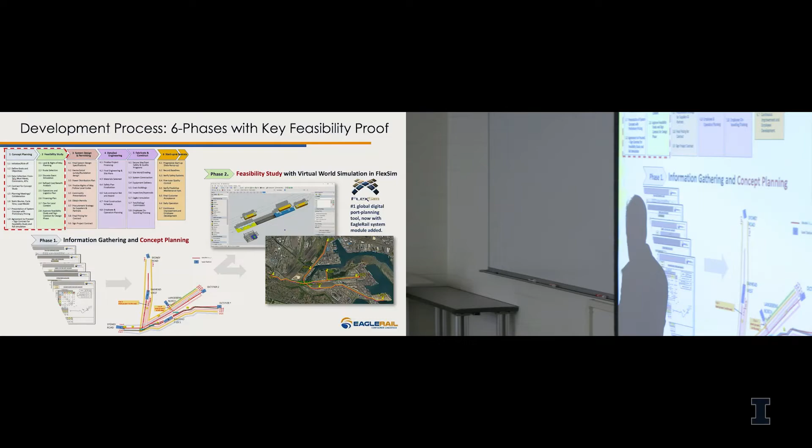Once you put it into the algorithm, we've actually done this, this is real. We shrunk all the little EagleRail pieces and imported it into FlexSim. I can change the rate of acceleration, deceleration, lift, and switch movement. Once I do that, then I put the nodes in. I put the volumes in each node from the table, and then I press play.

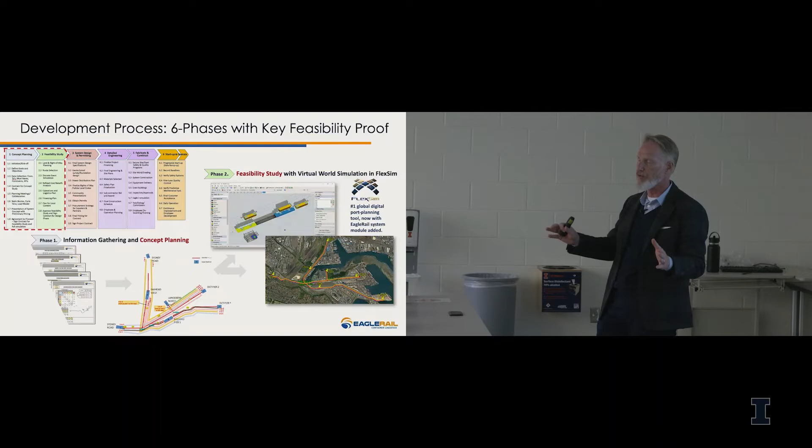If you've ever seen simulations, they can work in real time, or 100 times faster. You can just see your entire system start operating. You'll immediately see problems, too many containers over here, not enough carriers over here. You're like, holy smokes, I got to redesign this thing. So we would never even start true engineering drawings until we actually did a simulation.

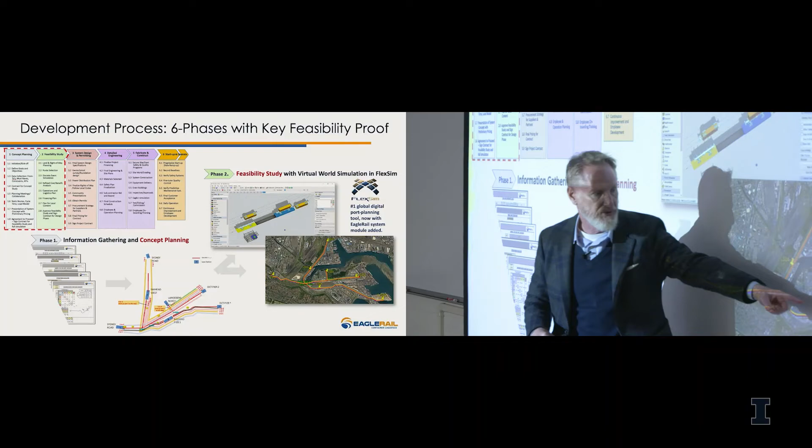Again, this is the Durban, South Africa situation.

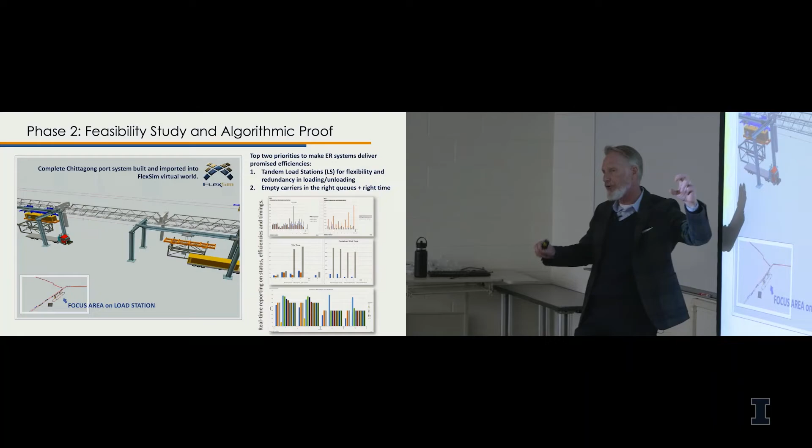Routes, we just talked about, routes and nodes, volume count. Then this is a visual simulation. So the video I showed you earlier, that's with an animation artist I work with in Chicago, but this is actual output from FlexSim. FlexSim can also output visuals. It'll give you all your data points, trip time, container wait time, whatever parameter you want to measure, you can get a measurement of it, and then you can see it actually operating.

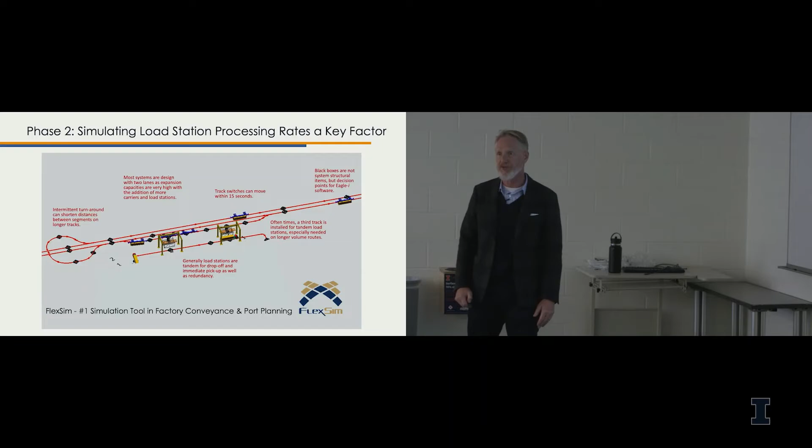I think this has some motion in it. Those black boxes are not structural pieces, they're decision points that the software has to make a decision on acceleration, deceleration, and movement, etc. So this is that loop I showed you earlier where we can actually bypass it.

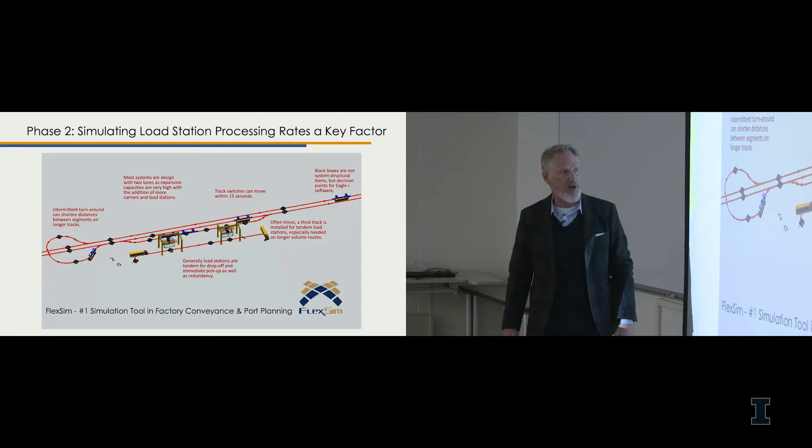This is the fixed truck loading, the tandem truck loading station. We like to use tandem loaders on the trucks for two reasons. One truck can drop off and it could pull forward and then pick up, so it's actually doing a dual process. And or if one of those should have a fail point, then at least we have one load station that's still operating.

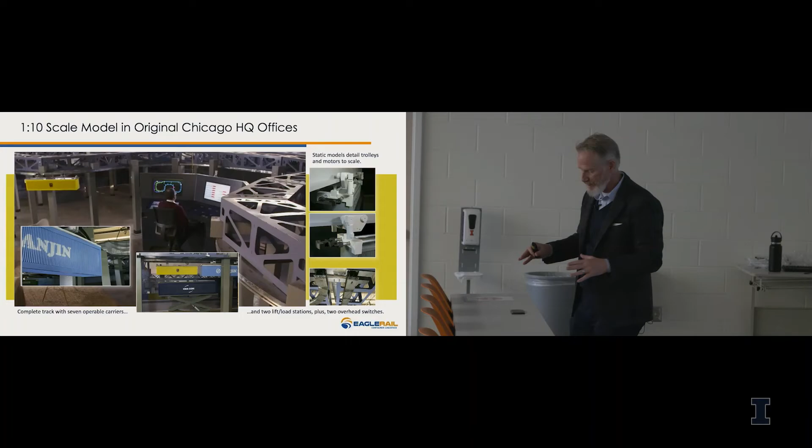When I first started this company, I couldn't afford a $10 million prototype, but I met this guy from MIT who runs their maker lab. He said, for $100,000, I'll come to Chicago and I'll make you a 1/10 scale model, so which is what he did. He ordered a couple of Chinese plasma cutters, we fed sheet metal in for a couple months, he cut all these parts out, we folded them, tabbed them, sprayed them. He built a control booth, and it actually ran for a little while. It's pretty cool. That's me.